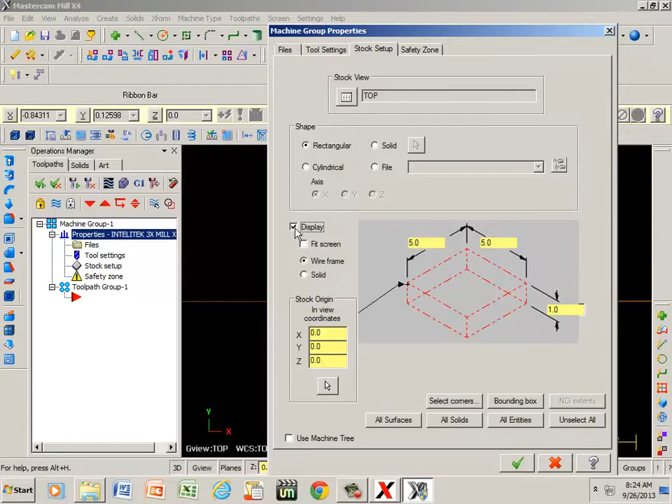I'm going to make a 5 by 5 by 1 inch thick. So if I just type in 5 tab, 5 tab, and 1 tab, notice that my origin or place of reference is in the center. So if I click here, I'm going to be machining off the bottom left corner or programming from bottom left corner. Now I want to click on display and green check.

Now if I take the roller on my mouse and roll it back toward me, I can center my material in the center of the screen. I'm going to go to create and click on rectangle. Now if I get close to the bottom left corner, watch what happens. It's going to snap right to it. Bam. There it is. If I take the left mouse button and hold it down and create a window larger than the red dotted line and click it one time.

Now here is my width or my x-axis, and here's my height or my y-axis. Let's type in 5, tab over, 5 again, tab, blue apply, green check. Okay, what I want to do is I'm going to create a pocket. So the easiest way for me to do that, I want it to be 3/4 of an inch away from all edges.

So if I go to create, line, and parallel, right here I can type in 0.75. And if I click this button here, my distance button, it's going to turn it red. That locks me in. So now if I click this line and go to the inside, do it the same way all the way around. Blue apply, green check. Now I need to go ahead and trim off this excess here.

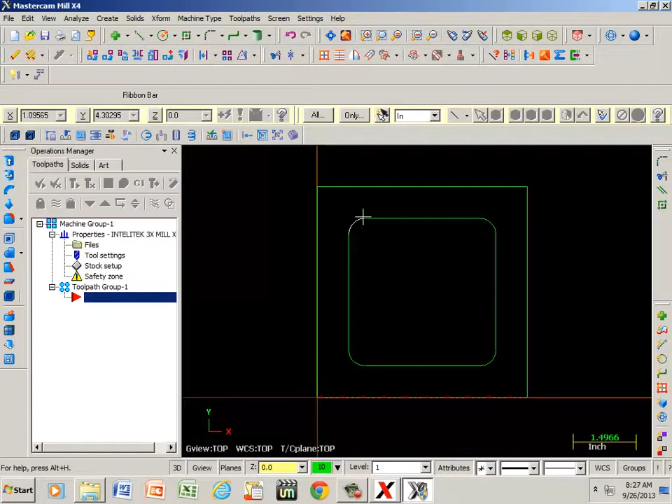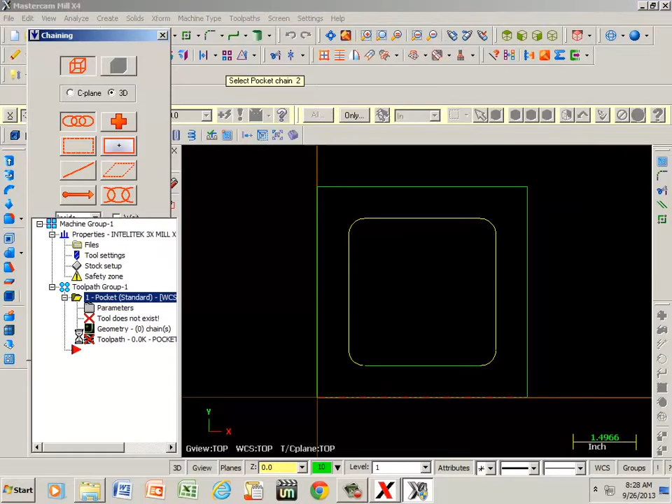Alright, now I need to go to tool paths. I need to pick a tool to machine this pocket out. So if I go to tool paths, scroll down until I get to pocket, and I'm going to name this pocket. That's my operation. Now if I click this line, notice it turned it yellow. That means everything's connected. Green OK. And I need to pick a tool.

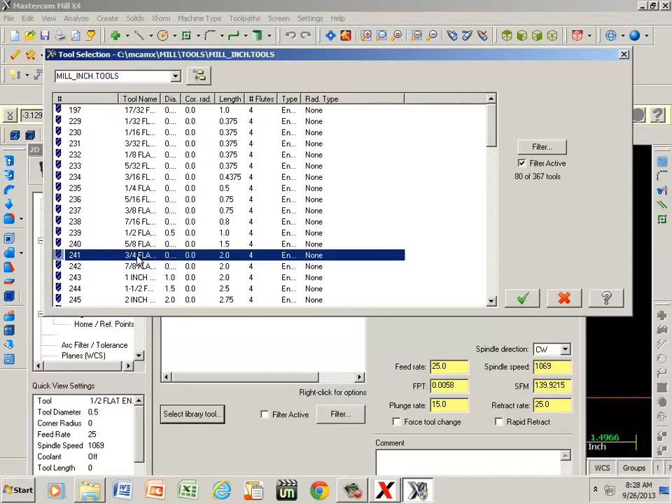Well, since that's a 3/8 radius here, the largest cutter that I could possibly use would be 3/4 of an inch or 0.75. So if I go to select library tool, and here's my 3/4 flat. I'm going to double click that, and it's showing tool number 241. Well, I don't have 241 tools in my carousel on the CNC machine, so I know that my 3/4 cutter is tool number 7. So if I double click this, I can change that number.

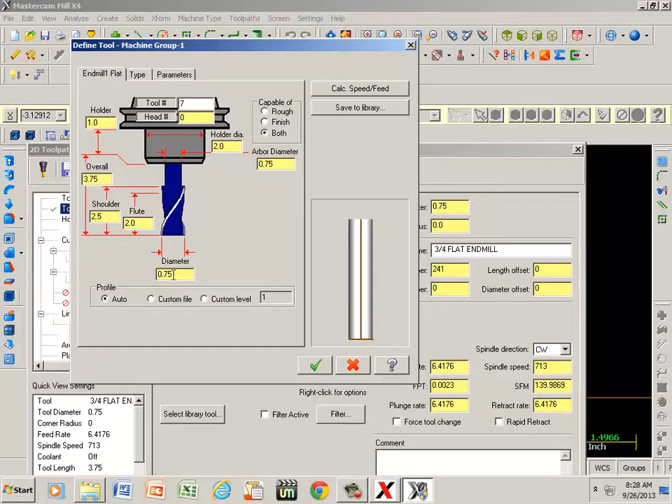Notice that we have 3/4 of an inch here. So we're still using a 3/4 cutter, but I renamed it tool number 7. We go to cut parameters, showing that we're climb milling, which is what I want. We are roughing, and I can pick whatever style I want.

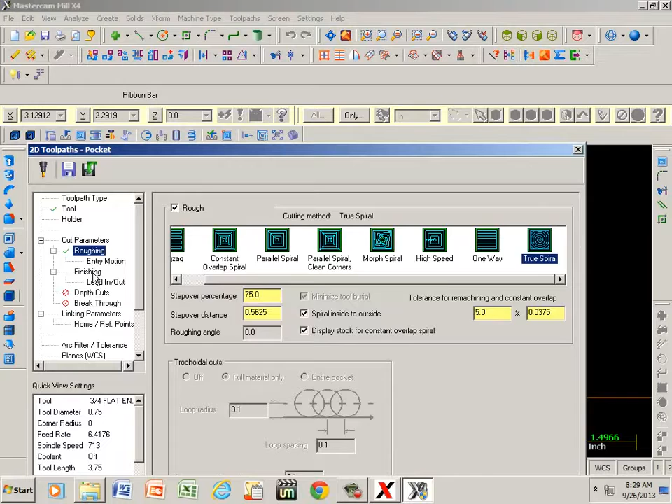The fastest way of machining a pocket would be to go to true spiral. So if I click on that, and I go to finishing, actually entry motion, here's helix and ramp. Helix is going to spiral around until it gets down to my depth of cut. Ramp goes 2 or 3 axes at the same time, simultaneously. As the Z is coming down, it's moving also in my X and my Y, or one or the other.

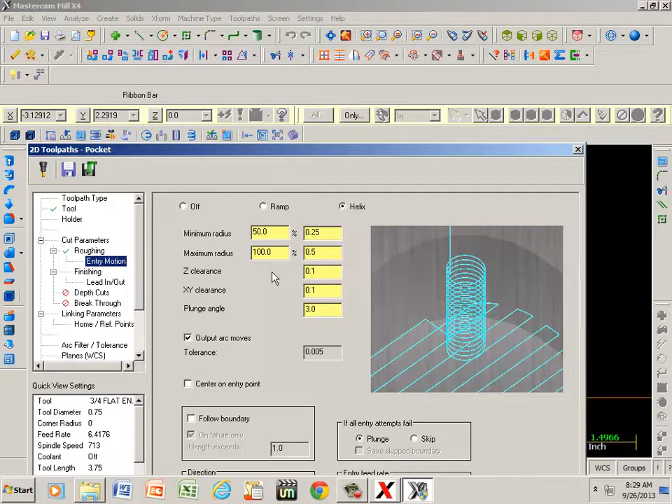Finishing is going to leave one pass, and it's going to save me 10 thousandths worth of material for cleanup. I can change that if I want to. I can change that to 50 thousandths or 2 passes at 25 or whatever.

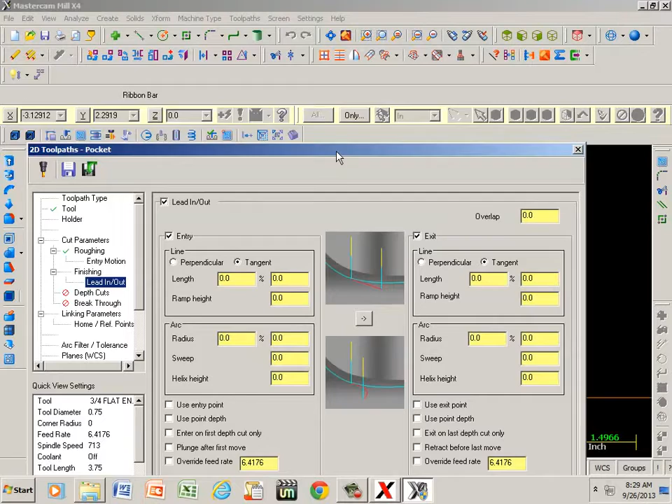Lead in, lead out. What that means is, as the tool is coming in, it leads in, it machines all the way around the pocket, and then it leads out, it goes down another 100 thousandths or whatever you want to take it. Leads in, goes around, and leads back out. I'm not going to use that, so I'm going to uncheck it. It grays everything out now.

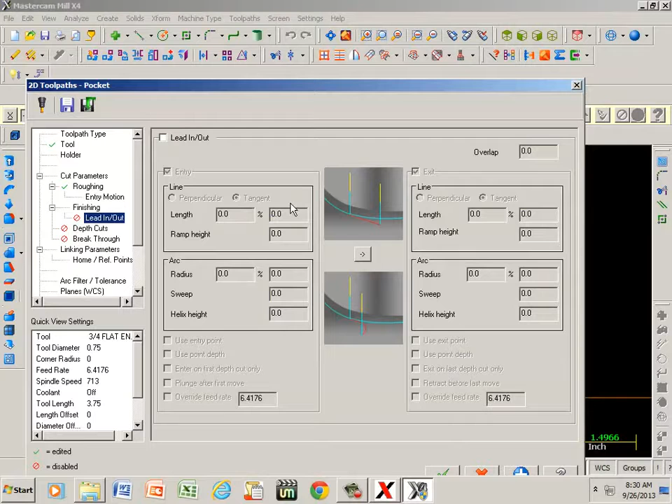Depth of cuts. I'm going to click that and tell it I want to go 100 thousandths per cut, 0.1, or I can give it more zeros if I want to. That's not going to change the value of that number. I'm not going to break through. I want to leave a pocket in there, so that's not even going to be an option.

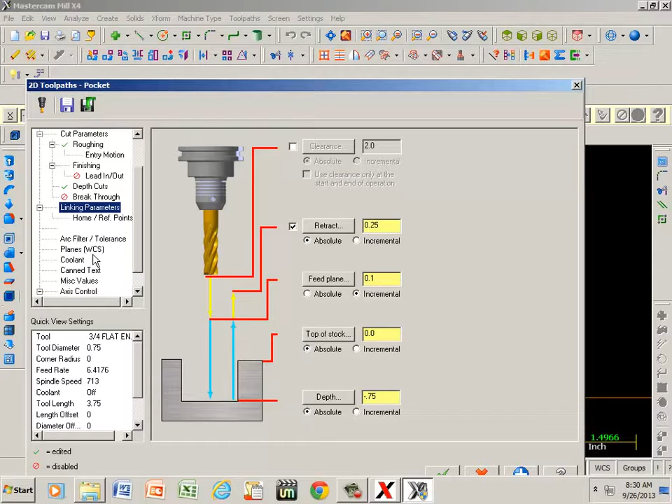Linking parameters, that's going to give me my total depth. Okay, we said that that's going to be 1 inch thick. I'm going to machine this 3/4 of an inch deep. So that's going to be minus 0.75. If I want to turn some coolant on, I can go ahead and click on coolant and click on flood and turn that on. Well, everything's done. So I hit blue apply, green check.

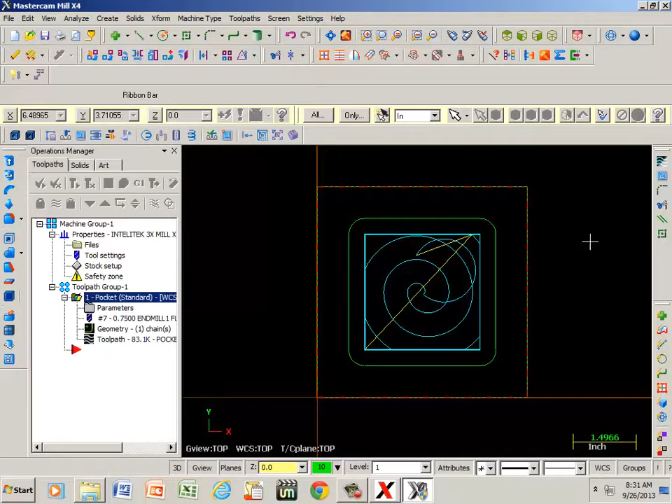Here's my tool path. A lot of times that gets in your way, so you can hide it, and you can do that by hitting Alt-T on your keyboard. One time shows me where it's going to start and machine around. One more time will hide it. Let's go to an isometric view. If I hit Alt F1, that's 100% zoomed in. I'm going to back off of it 25% by hitting Alt F2.

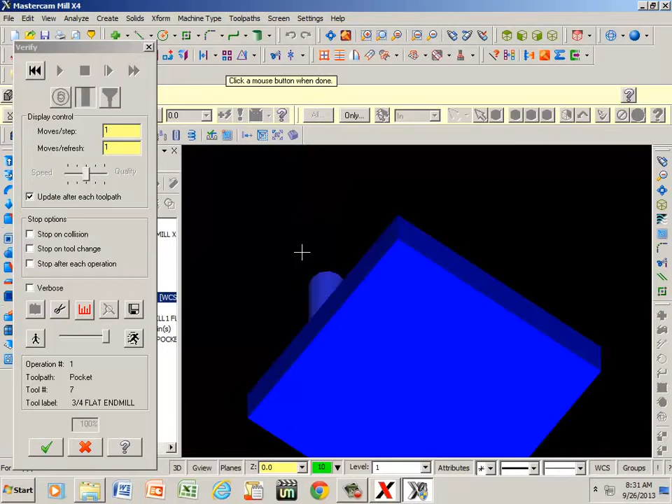Now here I can hit my verification and machine. If I hit right mouse, I can go to dynamic rotation and take a look at it, make sure I didn't break through, or zoom in and look at my radiuses, see what kind of finish I'm leaving. Everything looks good, so I'm going to hit green OK, and back to my isometric view.

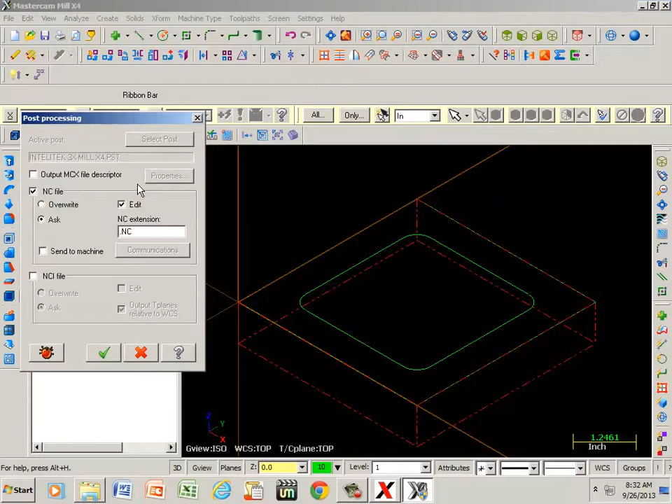Let's go ahead and generate code. So if I hit G1, green check, it wants to save it under an NC file. I can save it there, or I can save it to my desktop, or I can save it to a flash drive, or whatever I want. I can do that by going here. Here's a USB. I'm just going to save it under my documents. Actually, I think I'll just go ahead and leave it in NC and hit save.

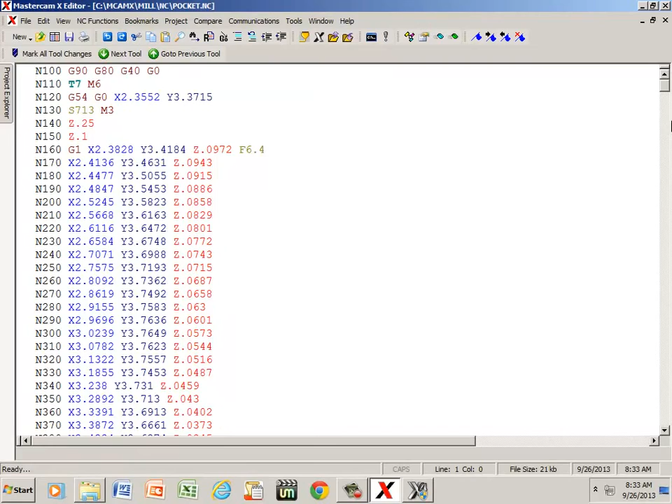Now here's the code. Starting off with G90, absolute programming, it's got various other codes that we will discuss later. Your G80, your G40, and G54, tool offsets, things of that nature. Scroll all the way down. M2 ends the program. Everything looks good. I'm just going to minimize this and we will continue with another video after this one.